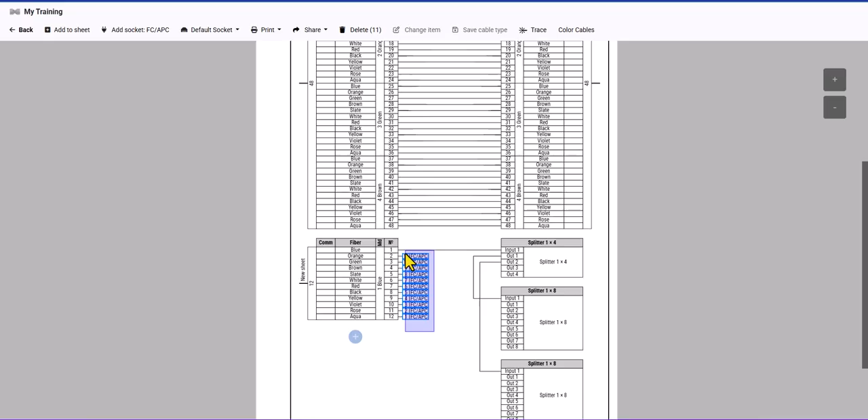From what I understand, it's basically a feature that hasn't been fully deployed yet, so there's not a lot you can do about it. So I was just going to bring it to your attention and let you know that I think in future updates they're going to maybe add patch cords or something like that. So future versions. We've hit most of the main major features on here. So here's a few other things you can do.

You can color these sheets by changing the sheet's color. So you have that option. If they want to follow some kind of color code that you come up with, you have that option too. We come down here and see that, and then that would remain a different color.

One great feature is that you can copy the whole sheet. I find it particularly useful if you're like this: we've already set this cable up and it's got the way we need it. So you could copy the sheet and then get rid of some of the parts that you don't want and keep what you do want on it.

So to copy a sheet, notice that these sheets, even though we haven't done anything on them, are an actual sheet. So basically what I'm trying to say is you have to go to a sheet that's all brand new. So you can do a couple of things here. You could remove the sheet, and then remove this sheet. And then if you did want to copy it right to this one, now you can.

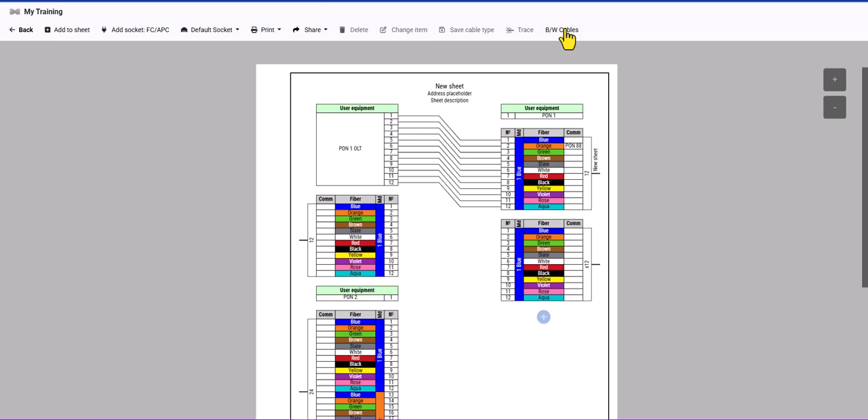I think I might have mentioned this earlier, but we do have the cable color, so you can color the cables by hitting this button right here. You got black and white, and you got color.

One really nice feature they have on here is to be able to share, which is slightly different than print, which we'll get to in a second. So you can either be in the sheet or you can select it from the bed sheet. If you're looking at your entire project, presumably you're gonna have these labeled a little bit better, but we could say that this is zone...

36, for instance. Let's see. Okay, and here, so we know that you have workers out in zone 36 today, and you want to send them the splice diagrams. So you just highlight the page, come on over here to share, and then share the sheet, and then click here, and it opens it up.

So this is literally being opened up. This is a link that you can share. So up in the URL bar, you can get the link. If I move this down a little bit, you can see the URL right there. That's a shareable link.

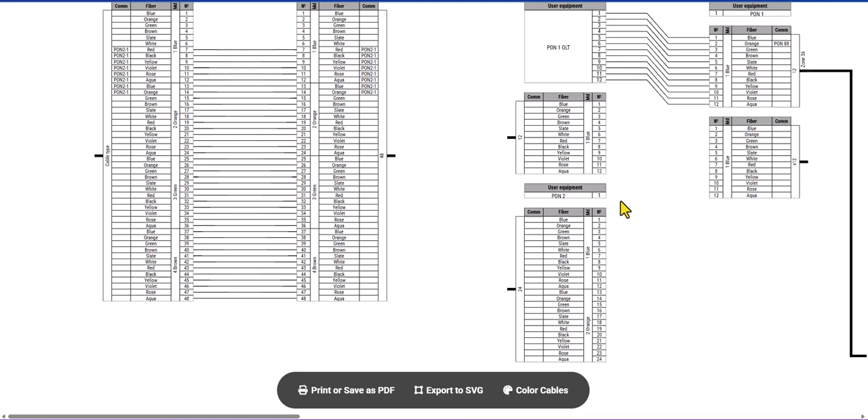Next thing is print. So this gives you, probably most of the time you don't want to be working in the bed sheets, since that's really getting a look at the big picture, so to speak, when you look at the bed sheet. So you can save it as a PDF, you can print it, save it as a PDF, export to an SVG.

So that's kind of like a scalable graphic kind of thing, a JPEG-ish type of thing, so an image, or save as a PDF. So say we want to do this, save it as a PDF, and just hit save. Now here's the thing, you can have all kinds of options here for what you want to do.

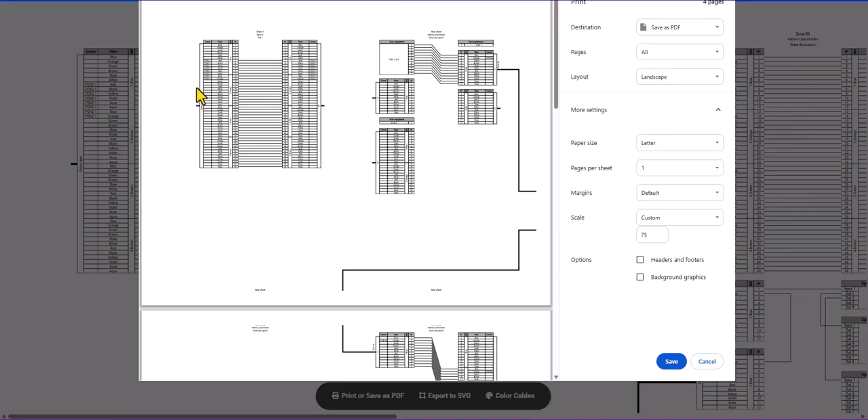The paper size, to try to get this, you have to do a little bit of playing around if you want this whole image. If you're printing it, you're probably gonna print it to a PDF and then package it from there. So you'll have to play with it a little bit, because obviously this is going to be difficult to get sheets that look nice in a PDF.

But you can play around with your paper size and grab like an A4, which is going to give you different size papers, and it's going to show you. So like an A0, it's gonna get everything onto one sheet. Obviously though, it's going to be big. So that's something you'll have to work out in terms of if you want this thing to look good in like a PDF document, which probably isn't the way to go. You're going to have to be a little more creative.

One way to do that is there's this scaling also that you can play around with and make it bigger, 100%, 50, and so zooming in. So you can play around with that. What I'm getting at is I'm just gonna save this thing to a PDF and open it up in AutoCAD. So let's do that, let's come on over here to AutoCAD.

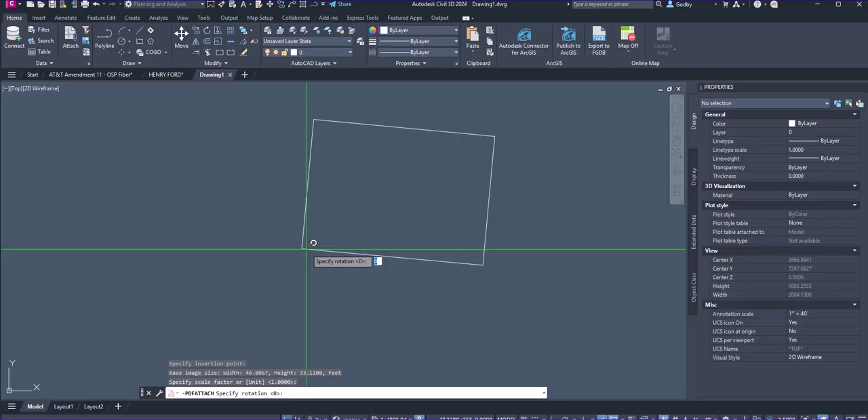So from AutoCAD, all you need is just drag in the PDF. It's going to watch the prompt, so we put everything on one page, we're good with that default page one. Then click your square. If you move your mouse a little bit, it's going to make it bigger or smaller. Take whatever size you like and hit enter, and you see it brought everything in for us.

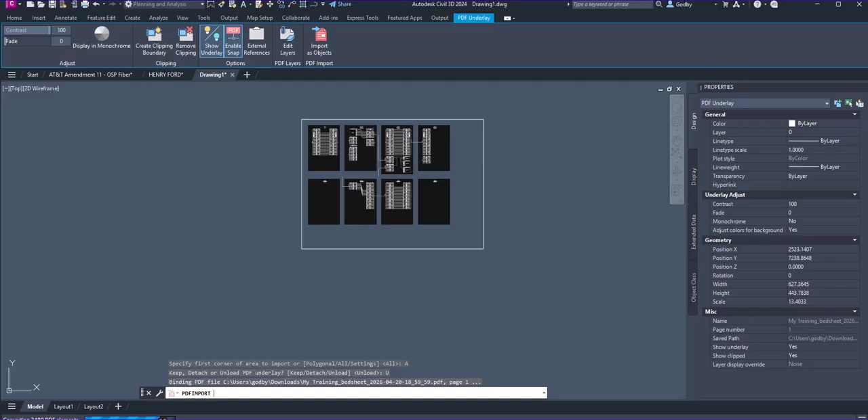So now what you do is you just select that, and it's going to give you import as objects, and then import all. Then we're just going to go up and unload what we don't want, and you can see it's doing its thing. So now we have them all in as objects.

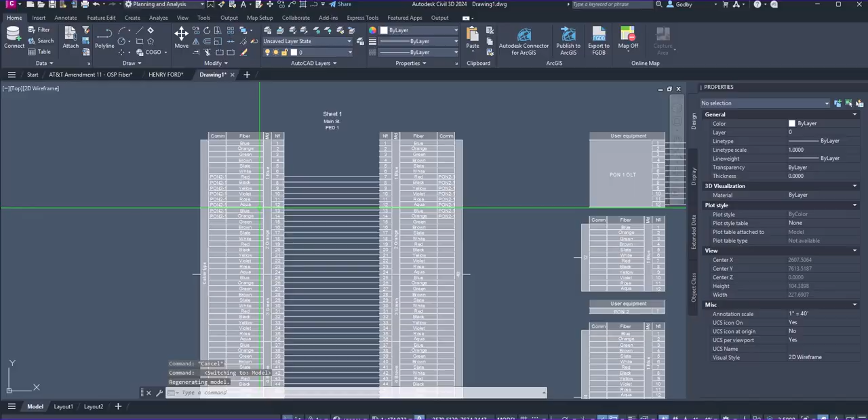A little bit of housekeeping here, it comes in with this, you can just come along and get to it. So now you're at a point where you can play around with it a little more. If you look at it in layout view, you can see - in model space you've got this at 20, and we don't really need to take that out because when you deal with it in layout view, it looks fine. So from here, you have access to whatever you want.

You could take these out if you wanted. You can grab this, you can move this guy around, whatever you want. So it's all yours now to move things around and do what you want.

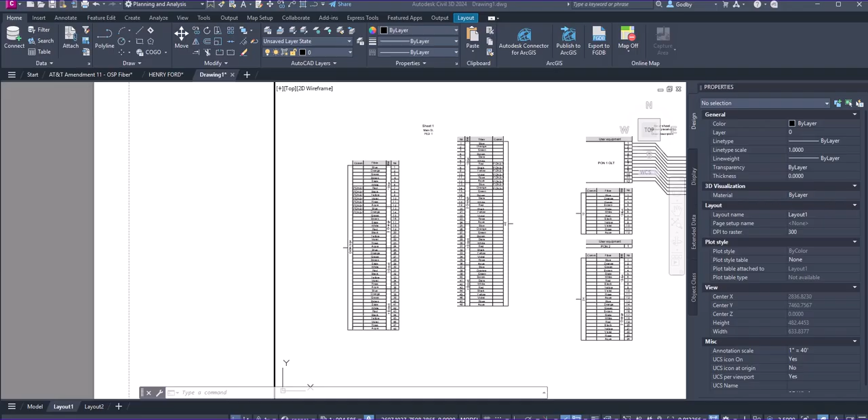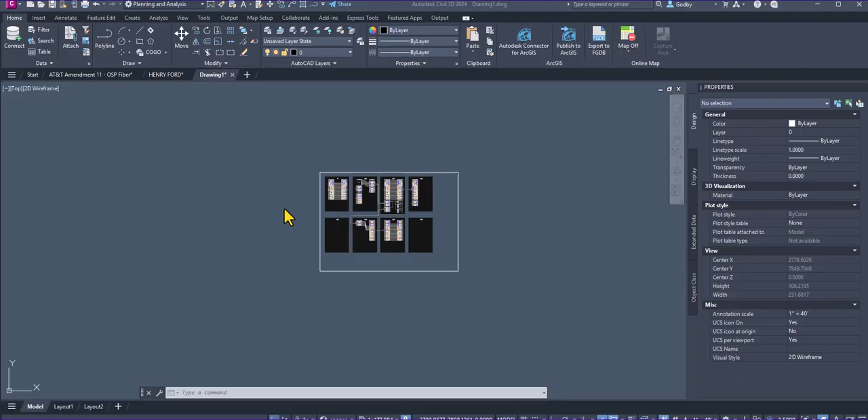One thing I forgot to do is you can colorize it as well, so I'll do that real quick to show you what it looks like. When you're back in your print view like this, you just come over here and hit color cables, and then it's the same thing - you just save it, so it's going to remember the last place you were at. If you just save it like we did, then drag it over to AutoCAD, you see I got it in AutoCAD now and it does have the colors, so those will follow as well.

Now, one thing you can do when you're in the main screen where you add your projects, you can do this and manage access, and then you can email another user, and the other user can log in. They'll have to have an account, and then they can use your project and do what they want. That's a pretty nice feature to have - that's how I've shared a few things back and forth. If you have a colleague who also has this software, that's how you share the project, because there's no real way to download this project and send it to somebody. This is basically how you would send it. Like if this was a DWG for AutoCAD, you would just download the DWG and send it to somebody - this is how you do it here, except you don't download it, you just give them access to it. So you can grant them access, and then you can also withdraw their access as well.